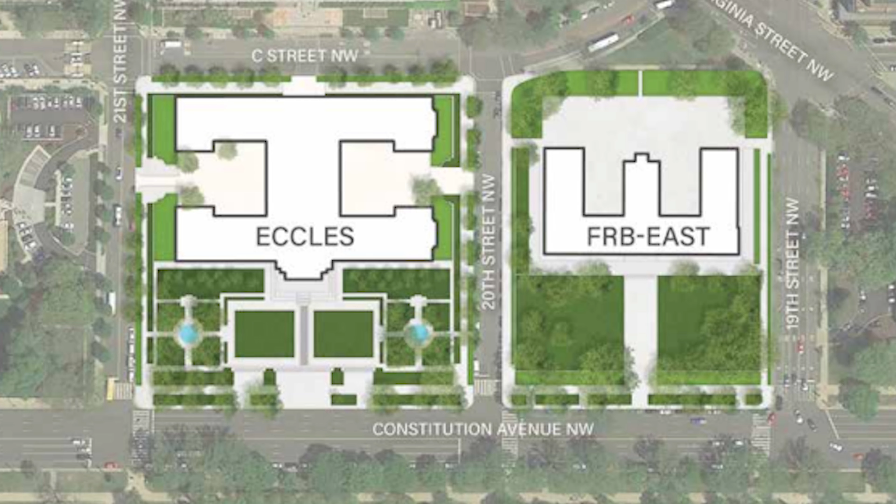Let's get into the project details of the Federal Reserve Board building project. My understanding of the scope of work, based on the information I have, is the following: the project consists of major renovations of two buildings next to each other, the Eccles Building and the Federal Reserve Board East Building. The Eccles Building has an existing gross square footage of 276,000 square feet. It's unclear exactly how much square footage is being added based on the information I have.

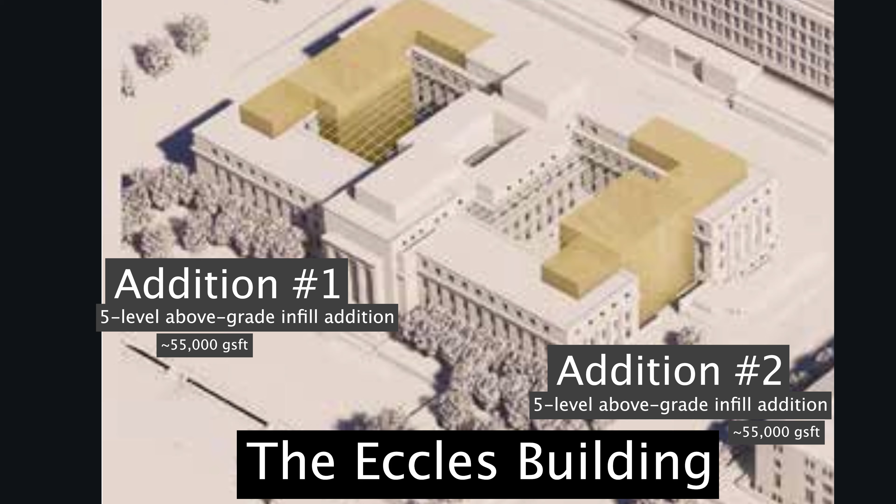I know it does involve two 5-level above-grade infill additions on the east and west sides of the building, each 55,000 gross square feet, for a total of 110,000 gross square feet added to the building. Another scope item is a level 4 addition on top of the existing level 4 offices - essentially adding a level there.

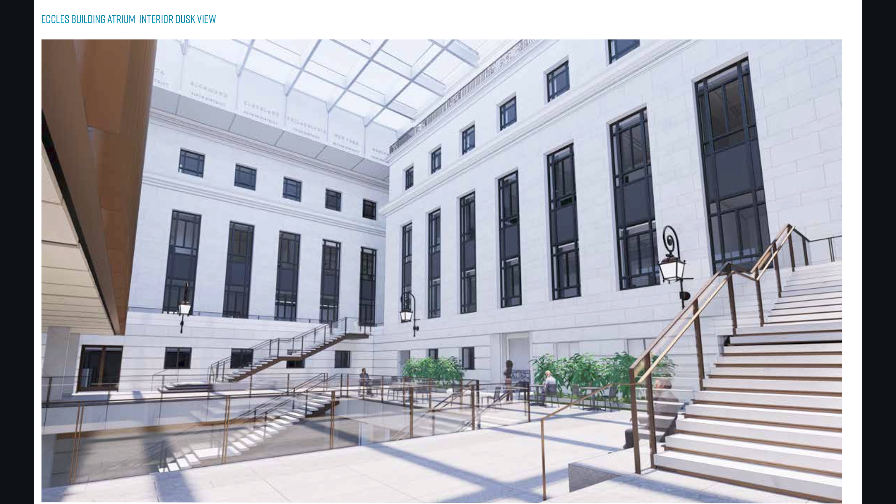The east courtyard and the west courtyard are both going to be converted into atria. The east courtyard will serve as a staff and VIP Eccles entrance. The west courtyard will serve as an employee interior garden and flex event space.

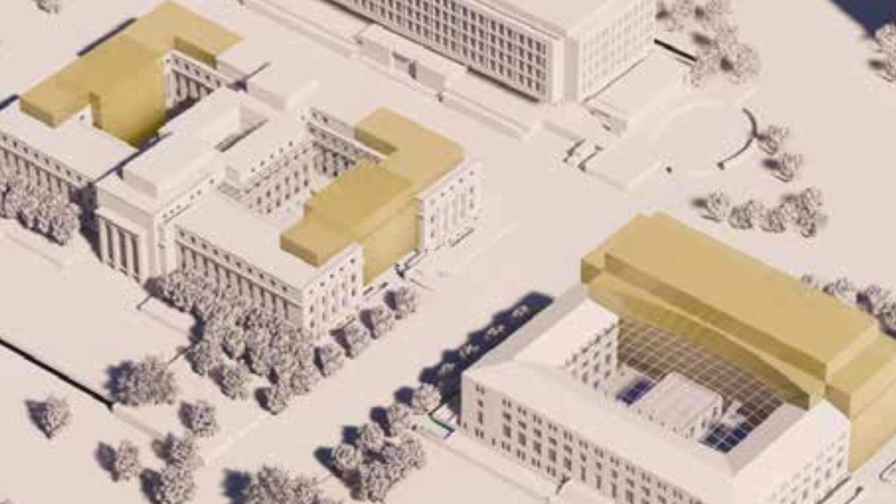Now let's talk about the Federal Reserve Board East Building renovation scope. The existing building area is 126,000 gross square feet. The estimated gross total added square footage will be 508,000 square feet.

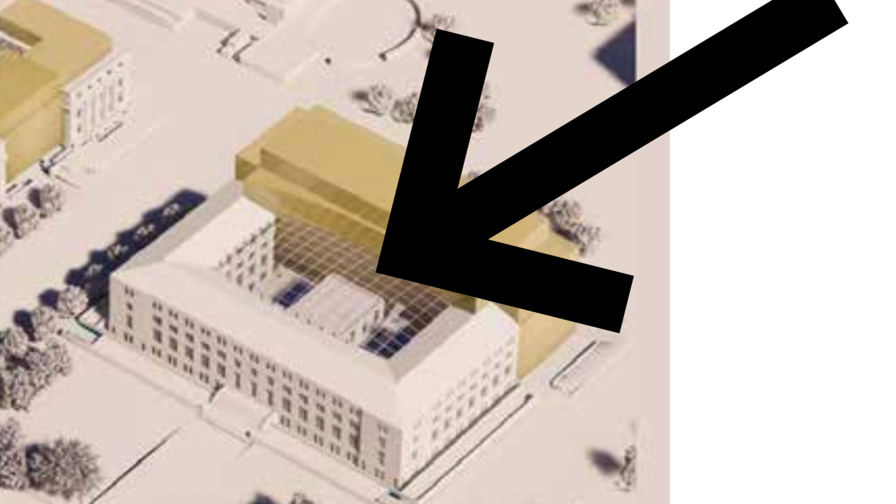The project will consist of a 5-level above-grade addition to the north side of the building, a 3-level below-grade addition for parking space, and a new tunnel to be constructed between the Eccles Building and the Federal Reserve Board East Building. The infill center will create a courtyard, estimated at 154,556 gross square feet, with a marble facade throughout.

What I'll be reviewing today is the project submission to the National Capital Planning Commission. This is public information, so for disclosure, these are not true construction drawings - they are not signed and sealed plans. What I'm reviewing is the final submission to the National Capital Planning Commission, which was approved, so it gives us a high-level, strong indication of the scope of this project.

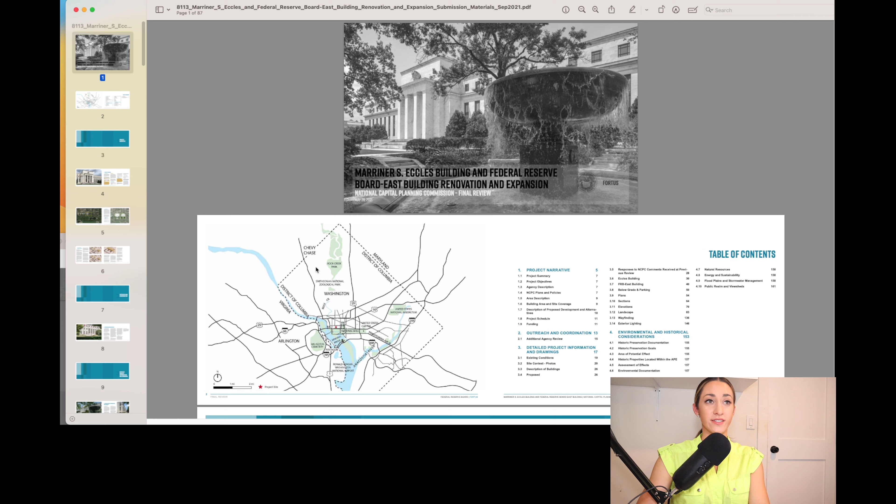We'll also talk about other things regarding this project, but let's get into it. For this project, there were three major submissions: one in 2019, 2020, and 2021. In this video, I'm reviewing the submission materials from September 2021, in which they were seeking final approval of final site and building plans. And here it is, the final review presentation for this project.

Before we get into the plans, I wanted to take a look at the Federal Reserve's website regarding this project. I'm recording this on July 22nd, 2025, and yesterday they added a video tour of the renovation of the two historic buildings. This is the project page on their website - what are the goals of this project?

The Federal Reserve takes seriously the responsibility to be a good steward of public resources. This project will reduce costs over time and addresses a complete overhaul and modernization, as the buildings have not been comprehensively renovated since construction in the 1930s. It includes remediation and updates to make the buildings safe, healthy, and effective places to work by removing asbestos and lead contamination, and accommodating modern workplace technology - complete replacement of antiquated systems such as electrical, plumbing, heating, ventilation and air conditioning (HVAC), fire detection, and fire suppression systems. That is serious - buildings without fire suppression and fire alarm systems is a big deal.

It's also a big deal when systems are antiquated and not up to current code - major mechanical systems, electrical, plumbing, heating, ventilation, and air conditioning. I would love to see a permit log of this project because I wonder, and I feel it should be verified, if the major mechanical systems have in fact ever been replaced since the 1930s, because there is reference to some renovations over time that have happened.

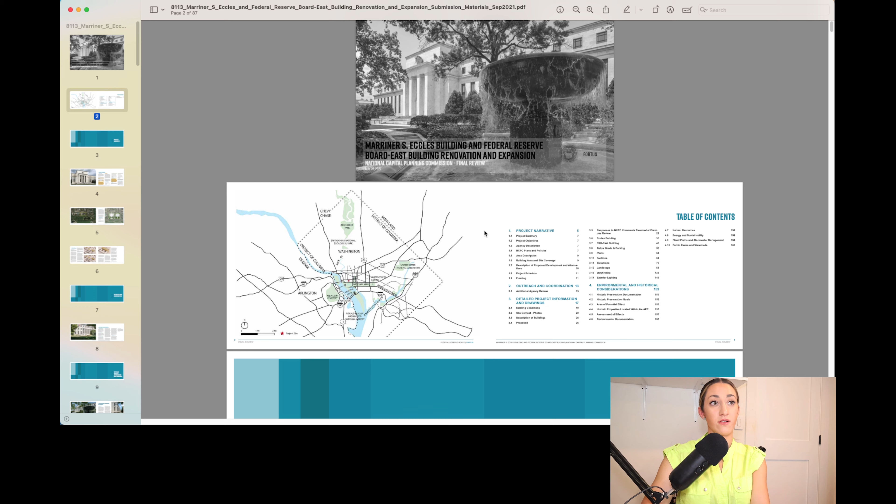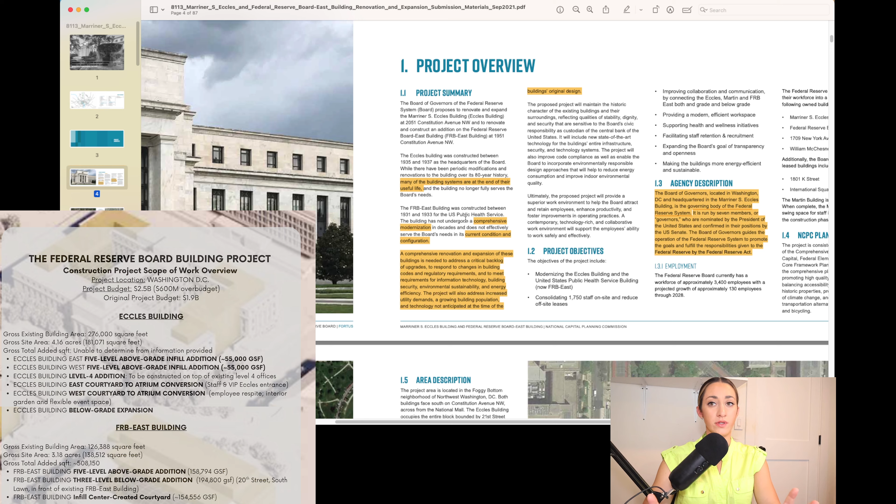How could anyone argue with that? But let's just go look at this. Let's get a feel for the scope of work of the project. So now we're going to dive into the construction drawings, the design, the details of this project in their final approval request presentation. From my understanding of the project, it is a renovation and expansion of 2 buildings next to each other, currently separated by the street, 20th Street Northwest. And again, I'm working with the information that I have.

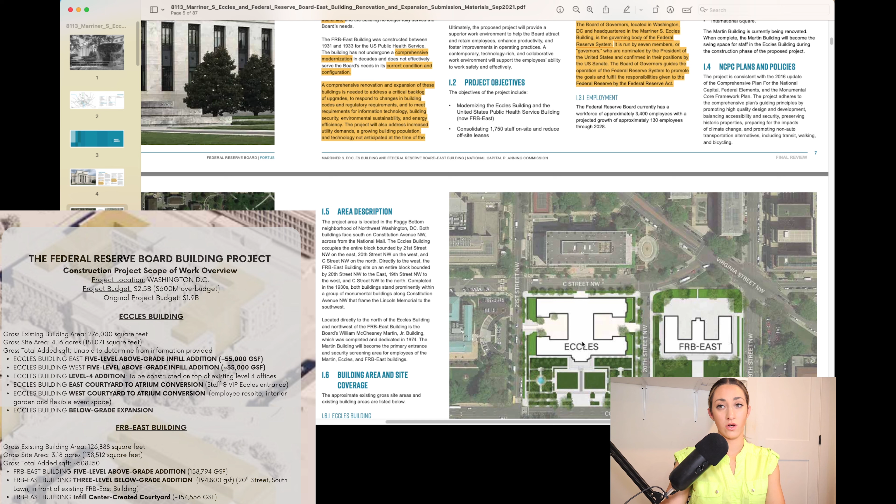Project objectives - the basis for the expansion aspect is to reduce off-site leases and consolidate 1,750 staff on site. Sounds like a good thing. I believe they want to create a new tunnel for pedestrian flow between both buildings, which I agree and think is useful. I've seen it before in New Jersey, New York, commercial office spaces between buildings, and it's just easier, especially for security. Once you're already secured and have access into a building, it's easier to flow between them. That makes sense to me.

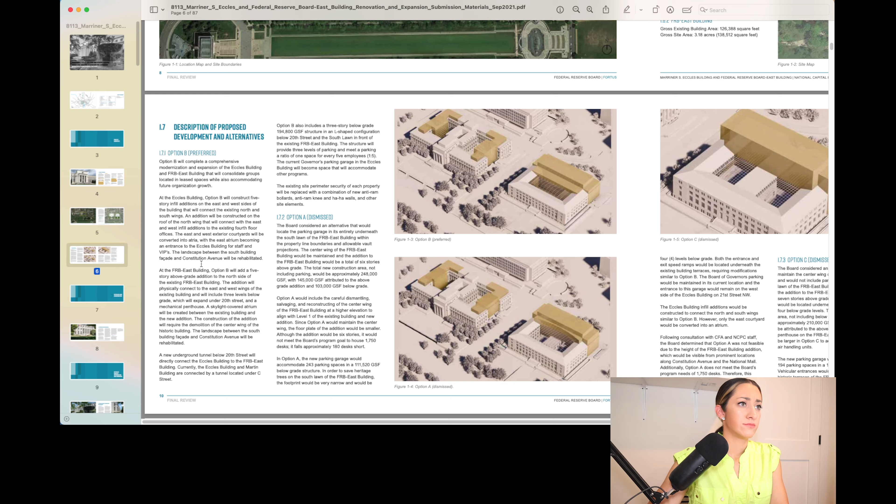So they provided different options here. They say option B is preferred. Existing conditions - it looks fine from the outside. It looks good here. It looks fine. That looks like a beautiful building. It looks fine to me.

Existing conditions of the exterior of the building, and the proposed project. I know these are just exterior views here, but I don't see anything wrong with the exterior existing conditions. Beautiful renderings - it looks like it's going to be a really beautiful project. The Eccles Building - here's the Eccles Building atrium interior dusk view.

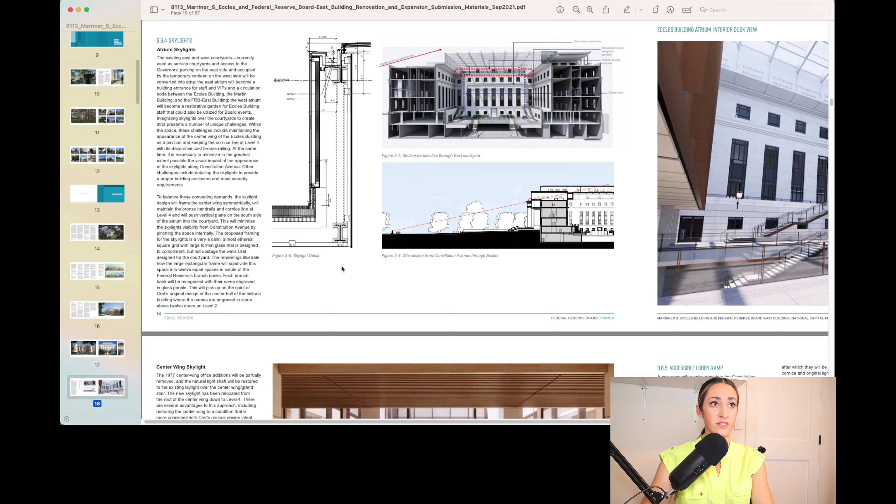They're showing a detail of restored skylights here. This is just beautiful, really beautiful building. Beautiful finishes here.

This definitely is a complete overhaul, modern contemporary-esque renovation.

Windows: the existing operable aluminum windows will be replaced with high-performance blast-resistant fixed aluminum window units.

The 5-story addition above grade is 158,000 square feet, with 3 levels below grade under the addition footprint infill. It really is a full...

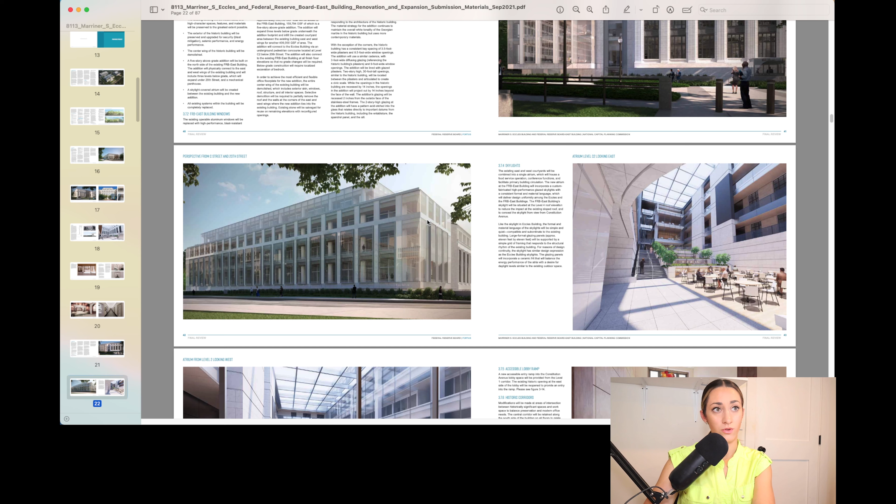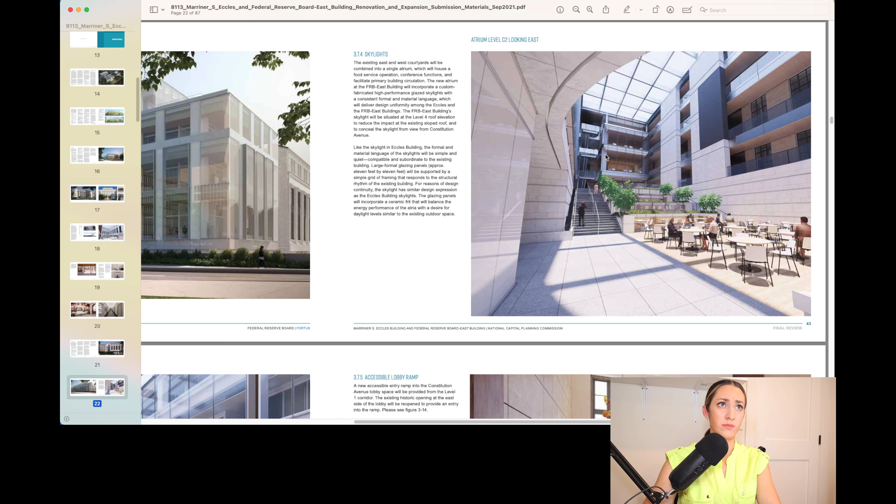Comprehensive renovation. And I mean, look at just how beautiful it is. This is the atrium level, C2 looking east.

This looks like marble walls everywhere. It looks like marble everywhere. That's really expensive.

These are renderings, but if I had a full set of drawings with finished details, I could be more specific, but this does obviously appear like stone and or marble, which we will see is used quite a bit further into this presentation. So I'm just going off that.

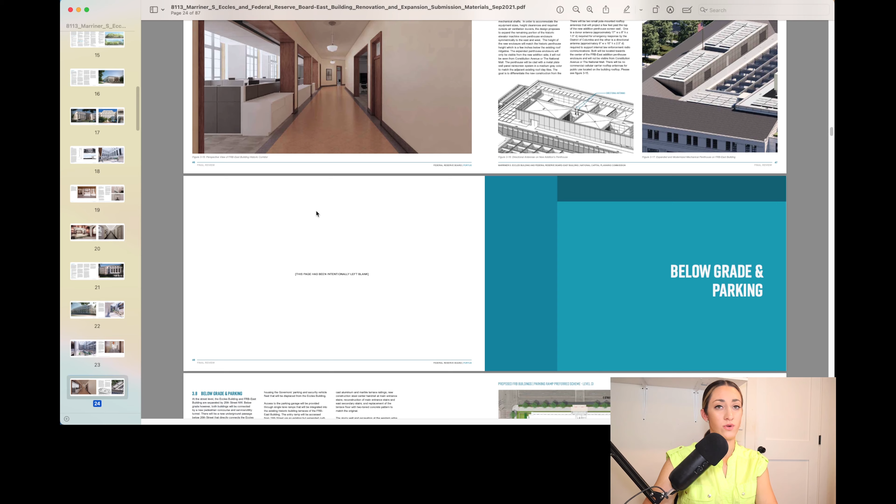So here are the plans.

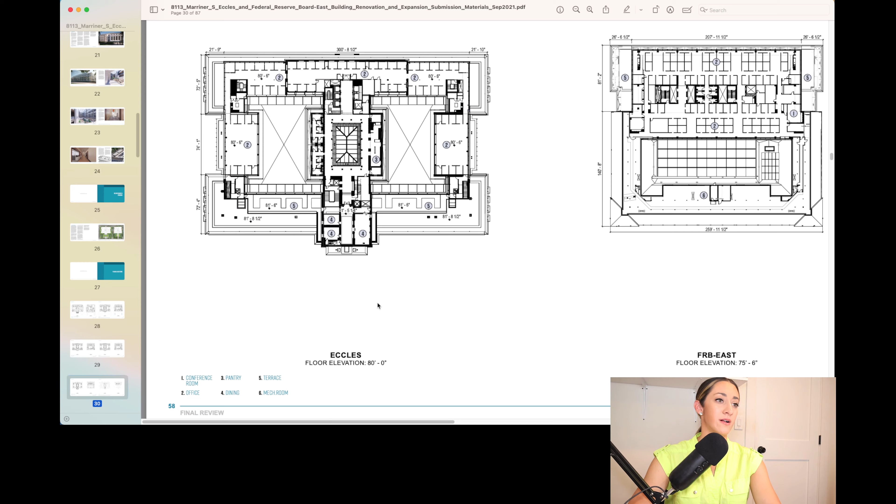You know what they missed here on this project, though? They should have installed a pool. It has everything else that would have been on brand with the rest of this project. I'm surprised that there's not hot tubs, cold plunges here on the vegetative roof terrace.

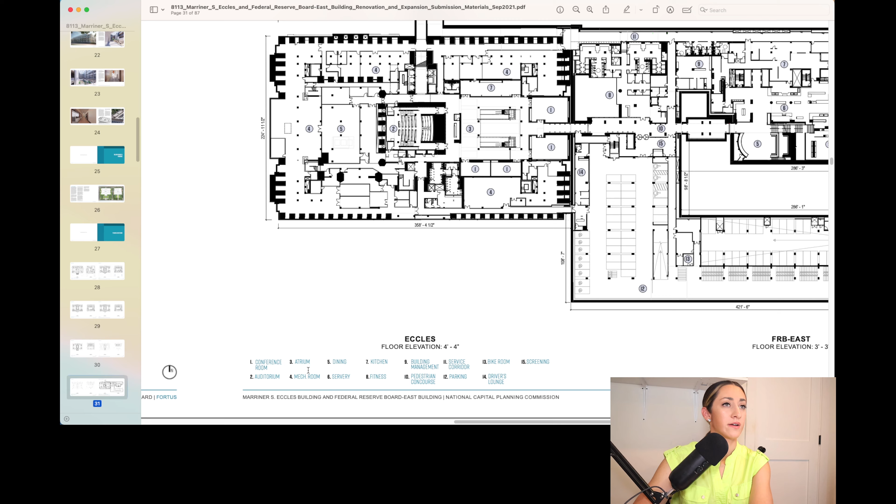We have here on this floor: conference room, atrium, dining, kitchen, building management service corridor, a bike room, fitness.

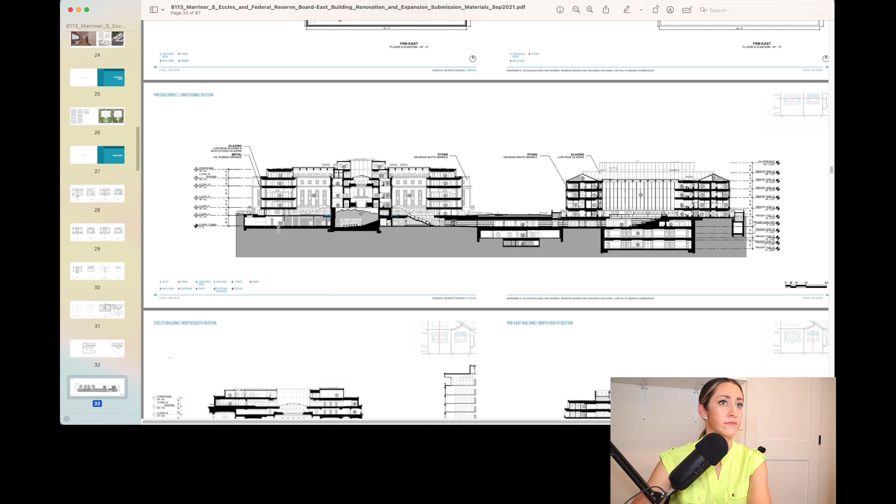Look at this marble, look at this Georgia white marble everywhere, cladded. It looks like the entire exterior is going to be marble city. It's going to be a lot of marble used.

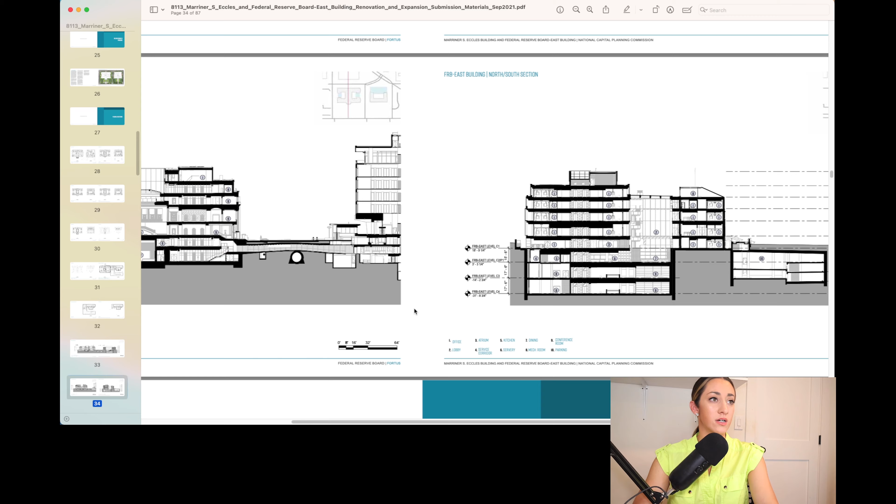If I'm not mistaken, that is the most expensive possible finish that could be used. I also saw it, I'm assuming that that is marble. Again, I don't have confirmation of that, but I am just assuming that with the amount of marble that is called out in these drawings, that anywhere I see stone could be marble.

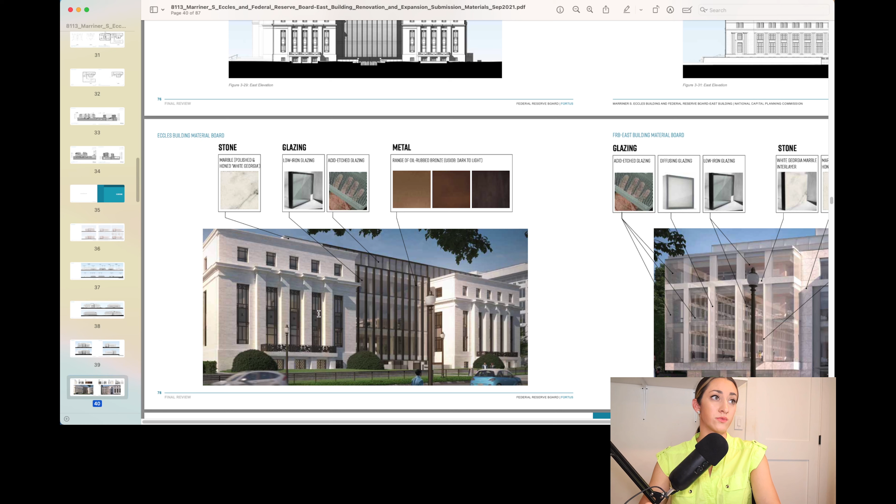There's also granite, a lot of granite used. So this is calling out the facade will be stone, marble, polished and honed white Georgia.

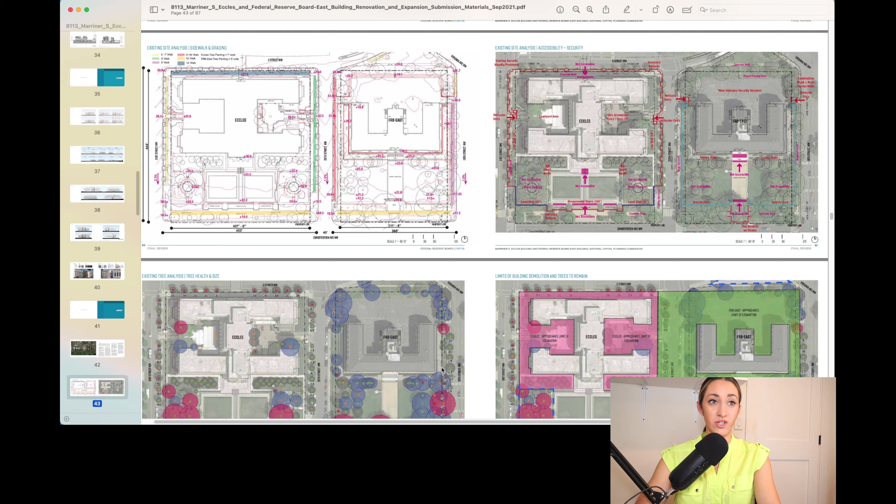Now, these landscape plans are fun, and the landscape budget for this project must be one of the biggest budget line items, because they're very, very comprehensive, and a lot of money is being poured into the landscape budget for this project. This project has a very big landscape budget.

So here's the existing conditions, and they pose it by saying existing security measures and deterrence. This one I think is funny: Federal Reserve Building, East 20th Street Northwest, with no street trees or planting at curb. Sad. Sloped planting area at historic terrace along 19th Street Northwest.

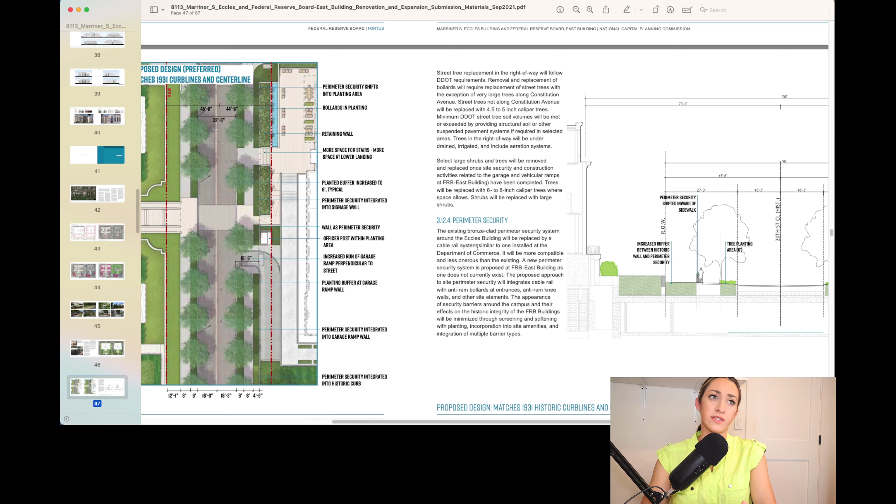A concern that they have, that they want to address through their landscape design, is higher security. So perimeter security: the existing bronze-clad perimeter security system around the Eccles Building will be replaced by a cable rail system similar to the one installed at the Department of Commerce.

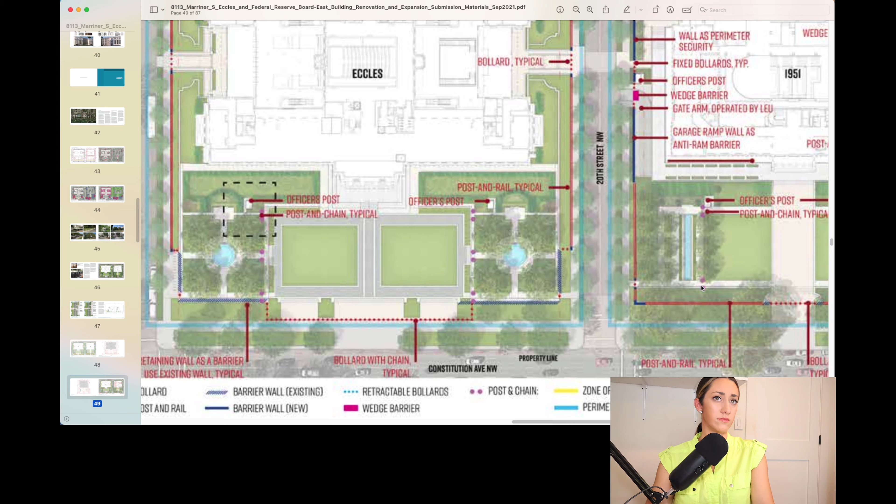So they want to increase the site perimeter security here. This is the site security diagram. They're adding a lot of security.

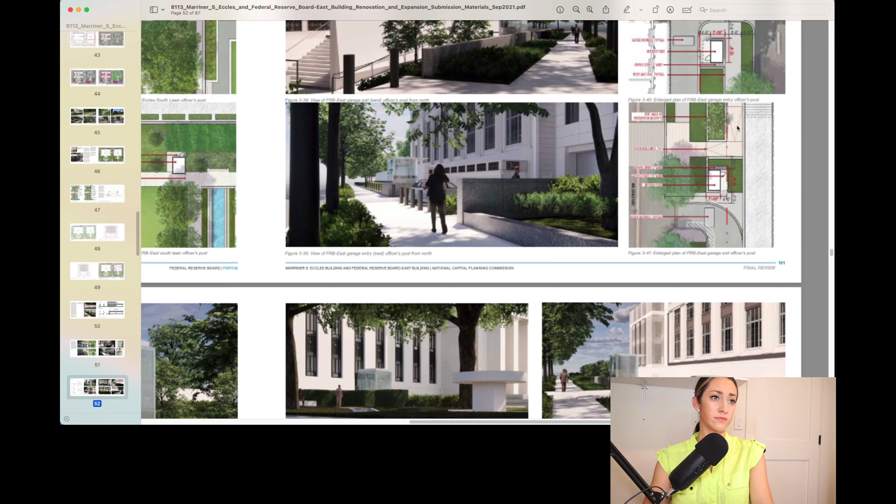This is part of the landscape plan that shows the finishes in more detail. You see this big area here, new granite paving. Granite paving here, granite water feature with arching nozzles from... I did see, and then more granite paving here, granite curb, reset existing granite.

I did see in a document, I don't know if it went through to the approval with the approved plans, that they are going to try to repurpose existing granite. I believe that was in the original initial submission, but this right here where you see it says new granite paving, that's a huge amount of granite that is being planned to be installed here.

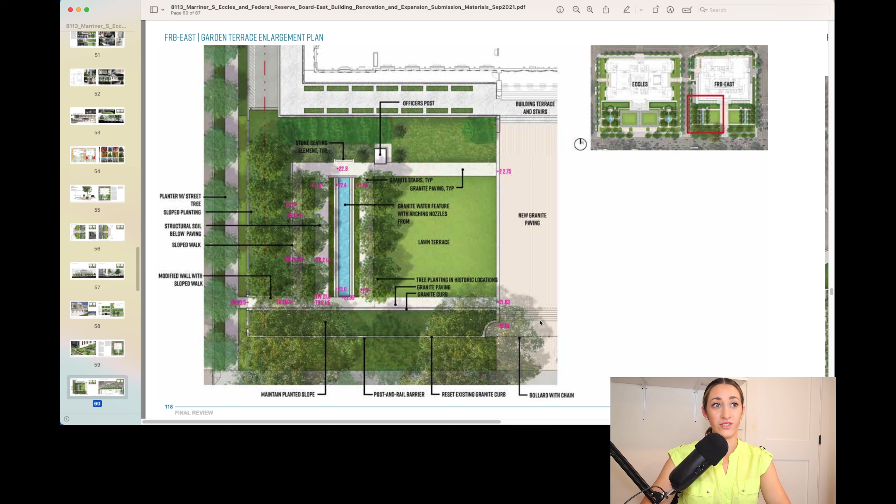And I also did see that there are existing fountains. I saw maybe one, there could be more, and I don't know if this is new or not, but granite water feature - we're gonna get into it and see these feature walls. It is expensive.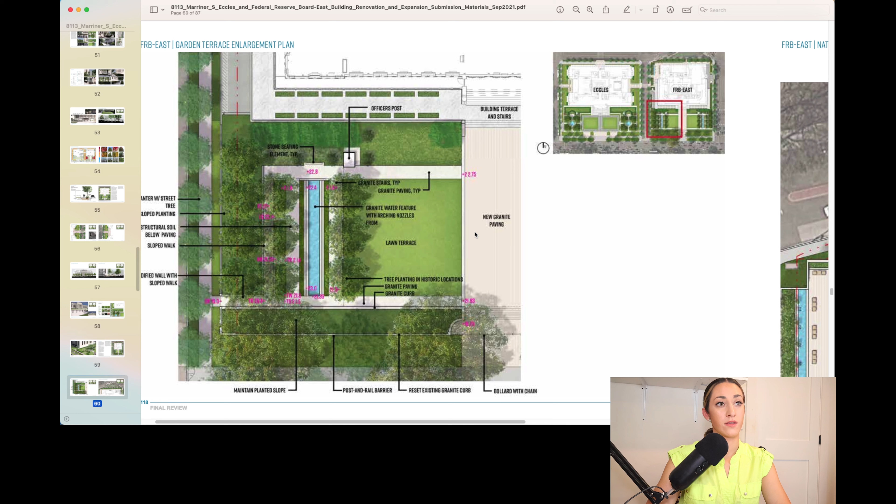This is just really expensive right here, what we're looking at. The new granite paving, the granite water feature with arching nozzles. I'm going to assume that that is...

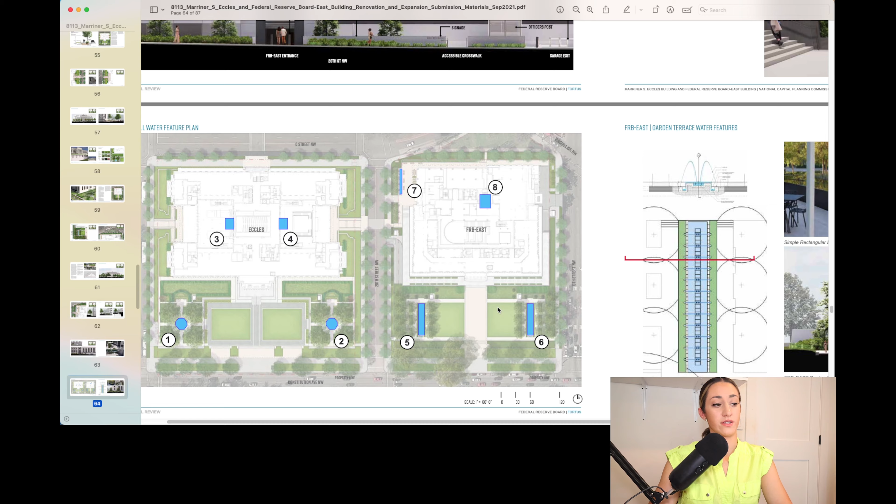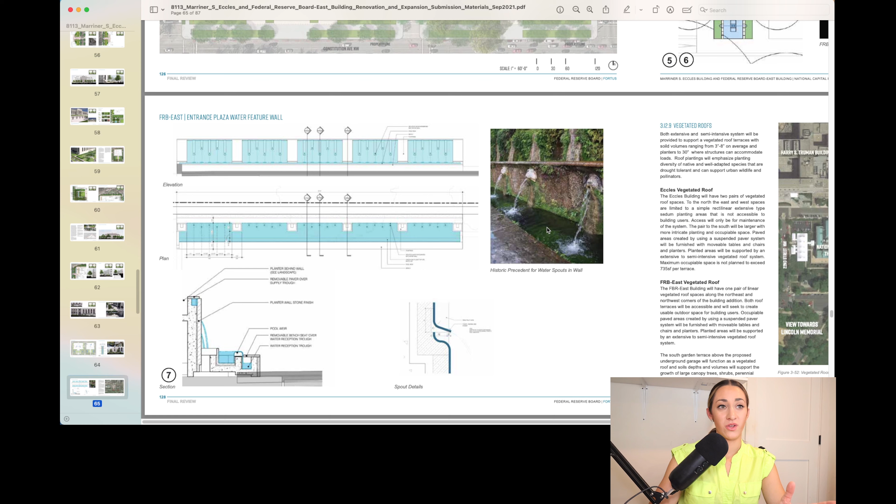Look at all these garden terrace water features. These are large cost drivers to the project. Entrance, plaza, water feature wall. Again, I have not seen this project budget. I would love to see it. I would estimate that these water feature walls, historic precedent for water spouts in wall, this is a huge cost driver of the project.

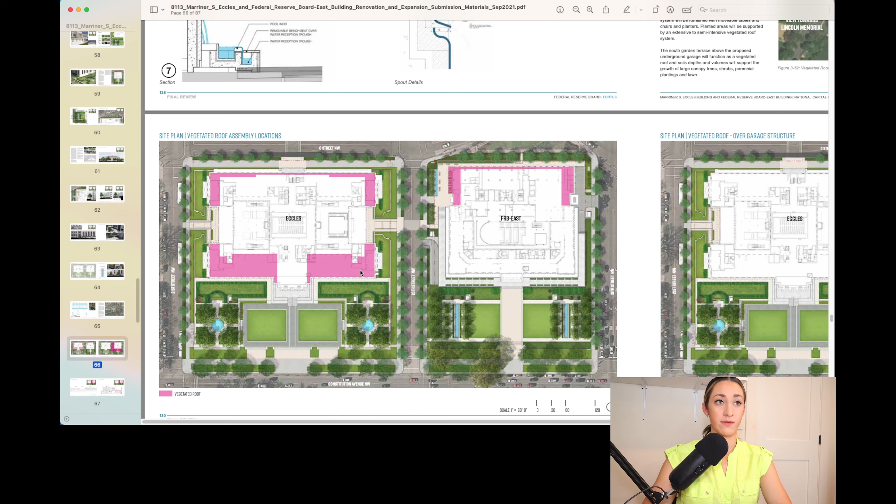Next to the water feature walls, we have the vegetated roofs. They have vegetated roof assembly plans. So much money has already been spent on the design phase of this project, on design, on engineers on this project already.

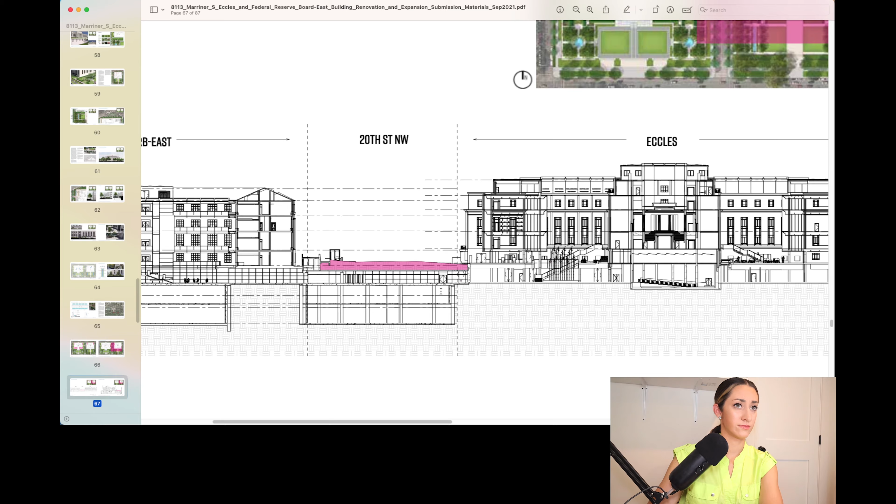This is a building section. So we see the parking here. That's cool.

Jerome Powell, Chair of the Federal Reserve.

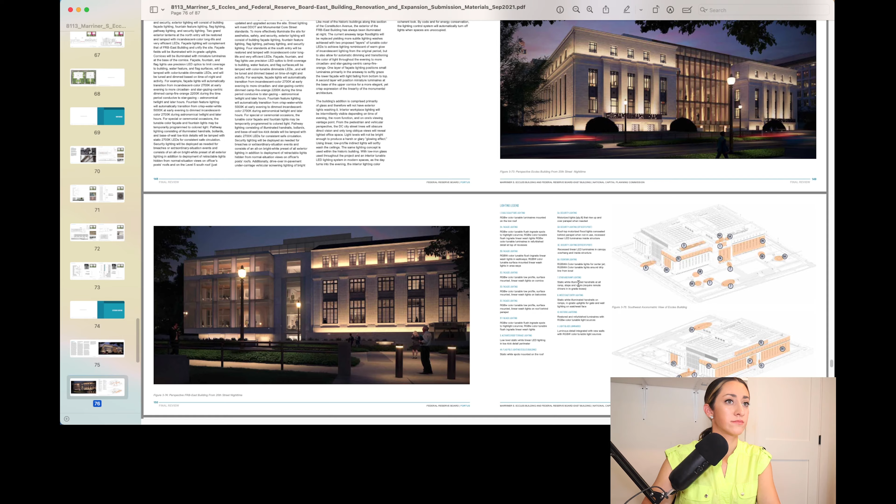Exterior lighting, energy and sustainability, passive and active design strategies, climate change, resilience. Be prepared to address the current and future risks associated with climate change. So this renovation will increase the preparedness of the Federal Reserve Building to address the current and future risks associated with climate change, henceforth why this renovation is necessary.

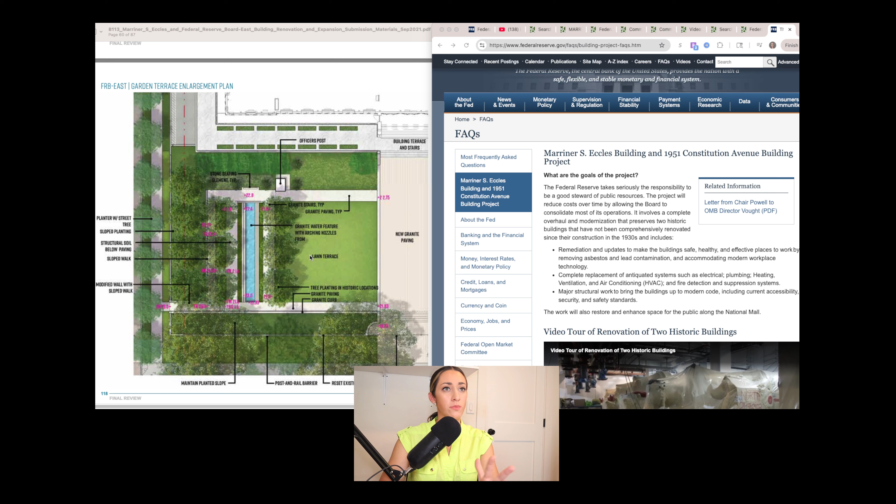So when you're looking at the project plans, and then when we go back to the Federal Reserve website, the 3 project objectives about remediation, removing asbestos and lead contamination, accommodating modern workplace technology. The remediation, first word out the gate, number 1 bullet point, number 1 word, remediation, suggests that the main project intent here is remediation, to remove asbestos and lead contamination, to make these buildings safe, healthy, effective places to work.

Number 1. Number 2, replacement of the antiquated building systems, MEPs, mechanicals, electrical, plumbing, heating, and air conditioning, fire detection and suppression systems.

If that was the case, I didn't see any MEP drawings. We saw some landscape. So regarding electrical, yes, we did see some lighting plans in here, but I didn't see, if there's such a strong emphasis on this bullet point number 2 of the complete replacement of the antiquated systems, I was expecting more in this presentation for there to be explanation of the replacement of these antiquated systems.

Electrical, what is the current electrical system, and wouldn't there be more emphasis on the revised electrical plans? Plumbing, what are the plumbing existing conditions, and how is it going to be rehauled, the entire system replacement, plumbing replacement through this? I did not see that in these plans. I also did not see HVAC system replacement, fire detection and suppression system installation. I did not see any information at all about that here in the plans.

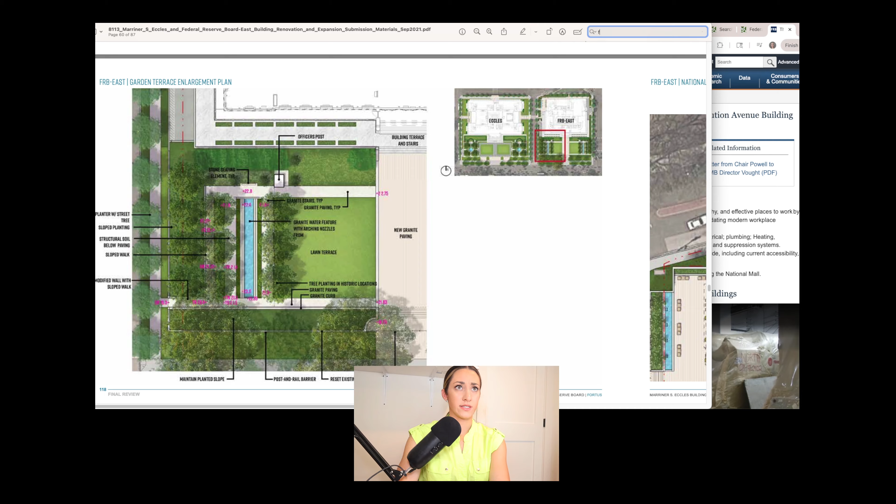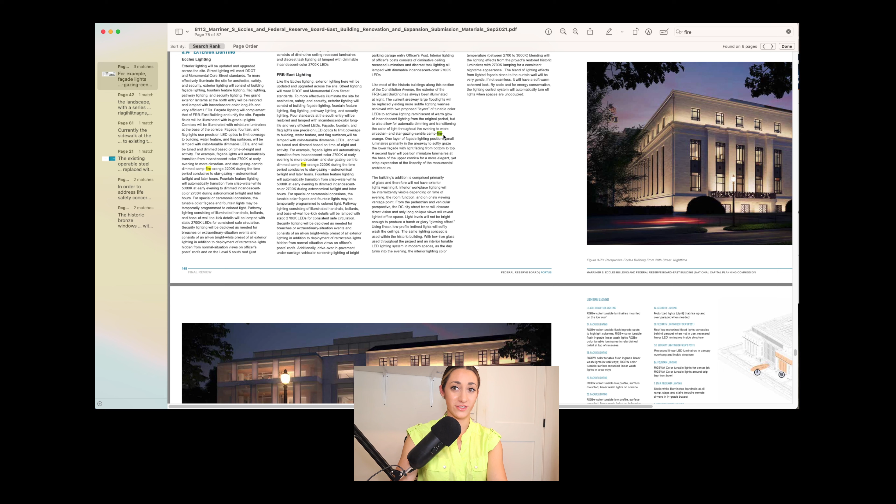When I Control F, when I search in this PDF, fire alarm or fire suppression could come up, 2 different trades. What comes up is the star-gazing-centric campfire orange, a finish color for the exterior lighting, 3 times.

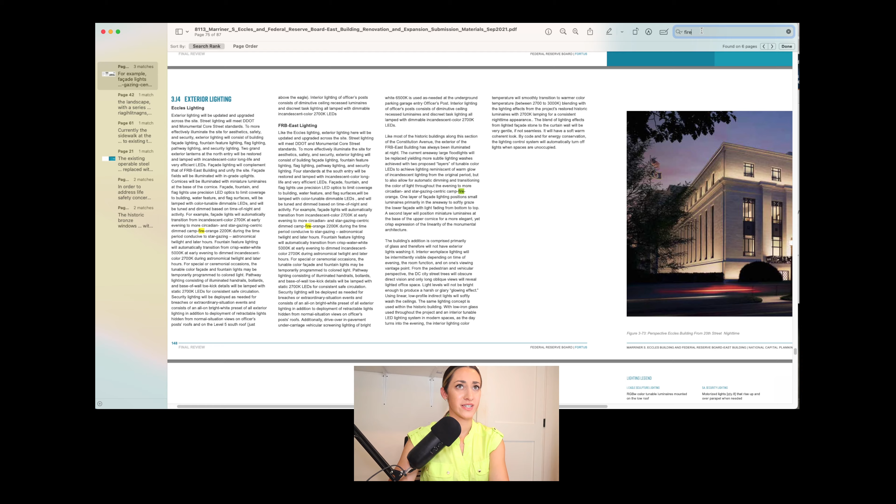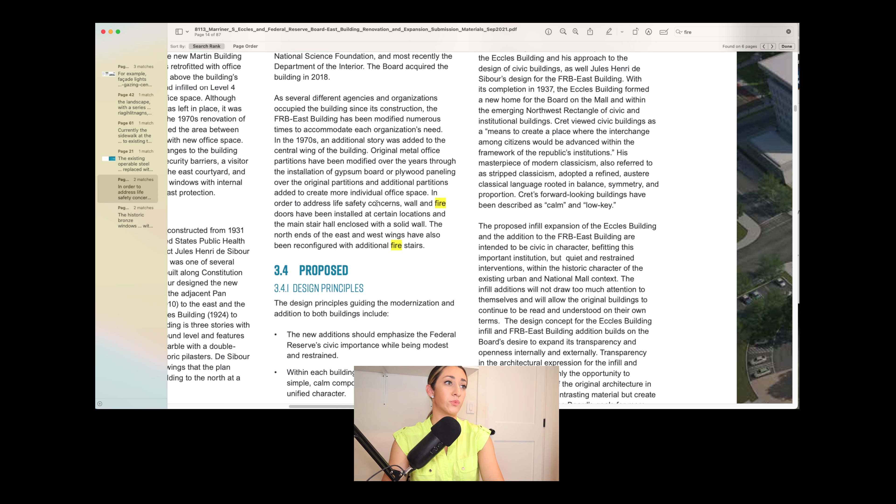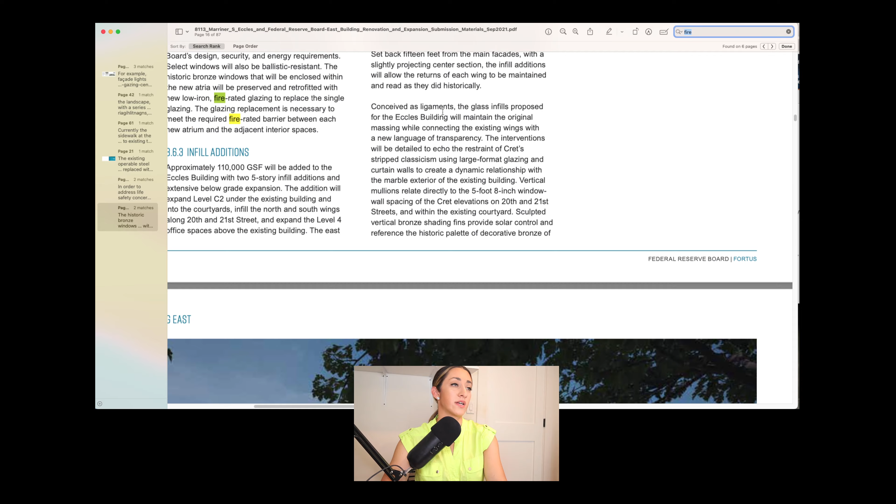Oh, here's something about fire. In order to address life safety concerns, wall and fire doors have been installed at certain locations. The main stair hall enclosed with a solid wall, reconfigured with additional fire stairs. So that is something that pertains to what we were just talking about. The fire rated glazing will replace, so there will be fire rated glazing at the windows to replace the single glazing. So yeah, I agree with that function.

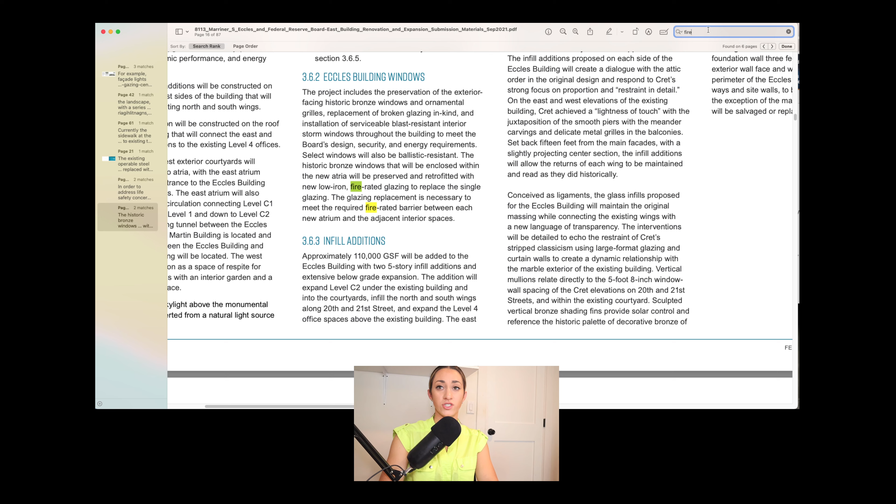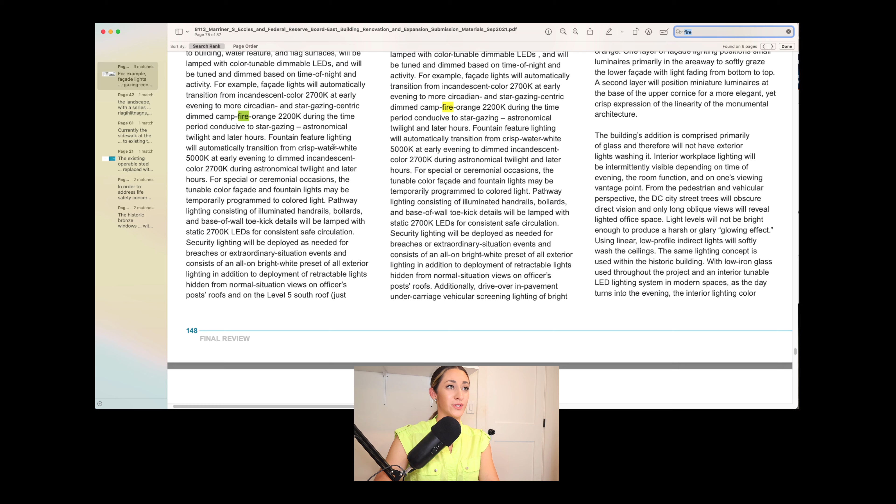Stargazing centric dimmed campfire orange, 2200K. Astronomical twilight and later hours. A fire hydrant, that's good.

And then the major structural work to bring the buildings up to modern code, including current accessibility, security, and safety standards. But particularly the structural work, I did not see in this presentation, like, I was expecting to see more callouts of, based on this third project objective, keywords major structural work, I am thinking that this building is structurally unsound and that it is structurally compromised and is a major hazard. But with regards to that, I didn't see too much about that.

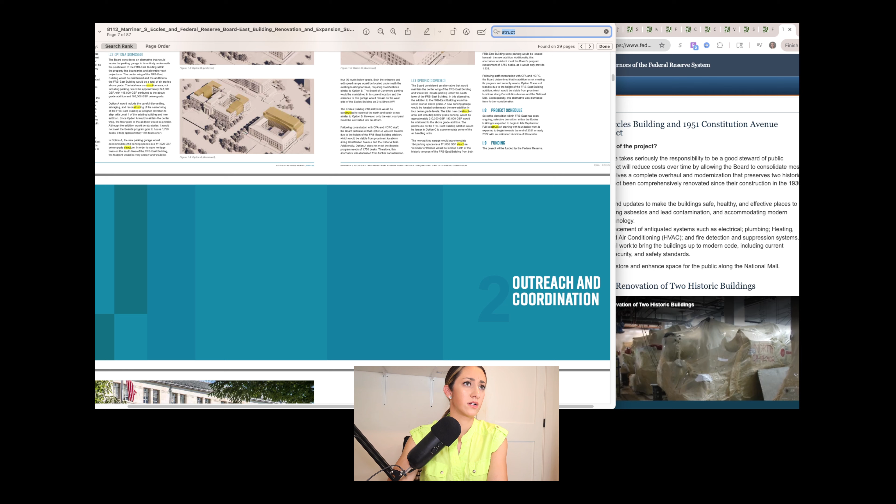I expect, based on this point, the major structural work that is required, I expect to see pictures and explanations of the structural hazards and the structurally compromised parts of the building that are in disrepair and need repair. I did not see that.

It says there's only 5 mentions of the word structural. One of them is how the large format glazing panels will be supported by a simple gridded framing that responds to the structural rhythm of the existing building. But they don't really go into the structural hazards that

their website says exists. There are structurally upgraded roofs - of course it's going to be new. Extended soil area, structural - it just shows the detail about the structural soil that will be installed in the landscape plans here. But yeah, high level.